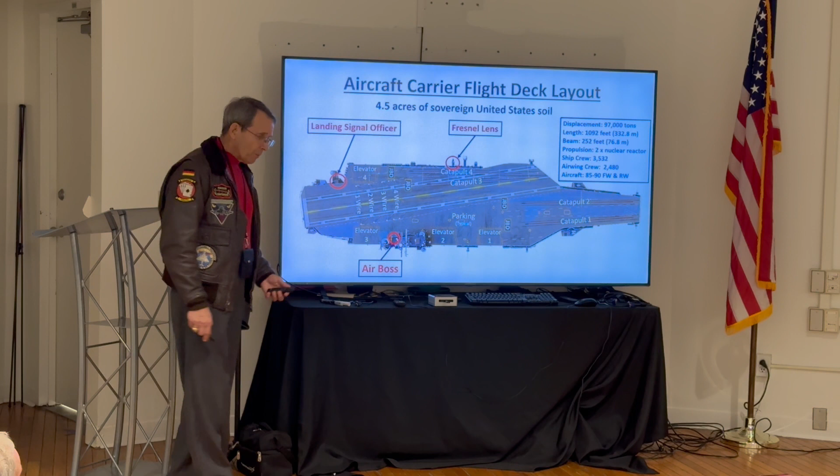In back of every one of these catapults there are jet blast deflectors. Those are a barricade or deflector of steel that's liquid cooled so it can stand the temperatures from an afterburner. They come up at about an 80-degree angle and are extremely effective at taking that jet exhaust and directing it up into the air.

You can bring a jet aircraft in right here in back of the jet blast deflector, while there's a guy in full afterburner here, and it's perfectly safe. It'll shake you around a little bit, but it's a perfectly safe operation. It keeps people from being blown off the deck.

Now, this is the landing zone right here. You can see the white on either side marking the limits, and down the center there's a white and yellow streak marking the center line. It's very hard to see here. There's also a red and white line around the deck, several of them.

Those are the foul lines. If anyone's over there, operation stops — you don't launch, you don't land. That's because it's too dangerous. When you're out there on the aircraft carrier, safety is the most important thing because everything out there is extremely dangerous.

Now, other important points here: the Fresnel lens. We're going to talk about this in detail later. The Fresnel lens tells the pilot very precisely where he is in relationship to the optimum glide slope that will put him down in the middle of the touchdown zone.

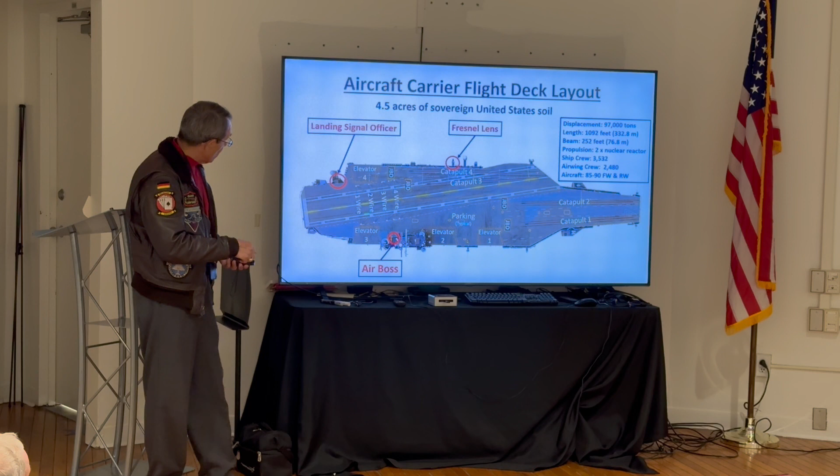That's where these wires are right here — 1, 2, 3, and 4 arresting wires across the touchdown zone. Each one of those is capable of bringing that aircraft, any aircraft, to a stop in about 400 feet.

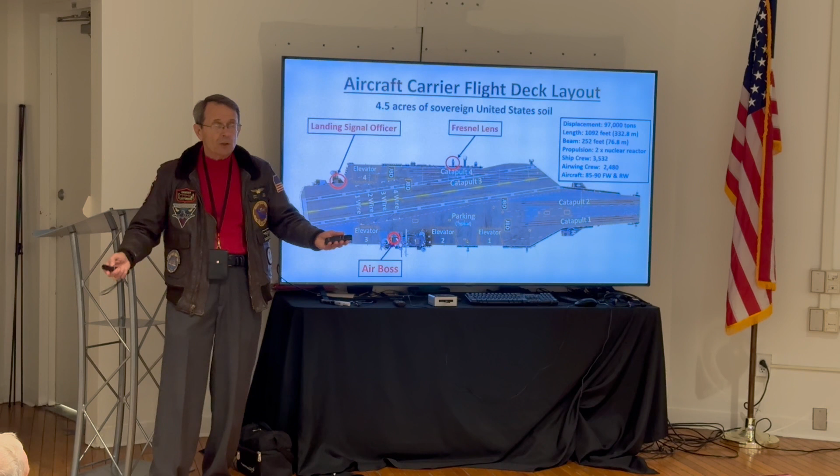If you fly the Fresnel lens correctly, you'll touch down between the 2 and the 3 wire. On the more modern aircraft carriers, starting with the Reagan, they only have 3 wires now, so they target the center wire because it's less people and a more reliable system. And aboard ship, they don't like it when you land in the first wire anyway.

So the other thing we have is that Fresnel lens. It's all the way down, and you can see it 2/3 to 3/4 of the way down the flight deck, which means the pilot can see that optical landing system all the way to touchdown. He should be watching it all the way to touchdown — not the deck, but that optical landing system.

Landing signal officer — yes, we still have that. Actually, it's a team of landing signal officers. They no longer wave flags. You saw them in World War II and Korean War movies waving flags, each one a different symbol to the pilot. We don't have that anymore.

Now he has a radio telephone. He's in back of a wind break, and there's actually a whole team of them out there that do the controlling of the aircraft. He's on a radio telephone and talks to the pilot — we'll go into that later. He doesn't wave a flag, but he talks to him and does other things out there. They're absolutely vital to landing aboard that aircraft carrier.

Then we have the air boss. He's back here on the rear of the island, and he's in charge of everything out here. Everything on the carrier deck he's in control of, and he controls the area around the aircraft carrier for 5 miles, up to 3,000 feet. Any questions about the aircraft carrier?

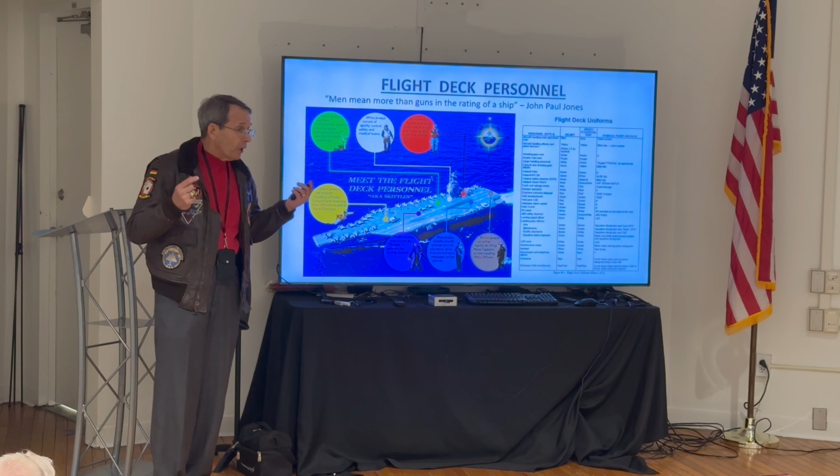Prime importance, yellow. These are the taxi directors. On an aircraft carrier, you do not taxi that airplane unless you're under the control of a yellow shirt. Yellow shirts give you hand signals like this. Everything is done with hand signals out there between the deck personnel and the pilots. If the pilot doesn't see a controller, or isn't sure which one is his, he'll stop the airplane. If an aircraft doesn't respond to the handler's signals, he'll give a signal like this. They love doing that to officers for some reason. But they move them around the deck because there are too many obstacles, too many aircraft, too much personnel out there.

Green jerseys, these are important guys. They do the catapults and the arresting gear. They hook the guy up, hook the airplane up, and retrieve the aircraft. It's a very dangerous job because they're out there when the airplane is actually being launched and when it's being recovered.

Purple guys give the fuel, they're the ones who fuel the aircraft. Blue shirts push and pull the airplanes, move them around the deck, and do that a lot of times in coordination with the yellow shirts. Maintenance guys wear brown, crash, fire, and rescue wear red, and other observers and medical come in white. That's basically the way it was all set up.

If you look at videos of the Chinese Navy, which has embryonic efforts at making a carrier Navy, they do the same thing. They have all these color-coded jerseys so you can see who's out there and if someone belongs there, okay?

Skunk Works tip. When I was aboard, one of the top engineers I worked with at Lockheed Martin Skunk Works told me one time he went out to an aircraft carrier. Lockheed gave him the opportunity to go. I said to Steve, one of the top engineers, when you got on that aircraft carrier, what impressed you most about it?

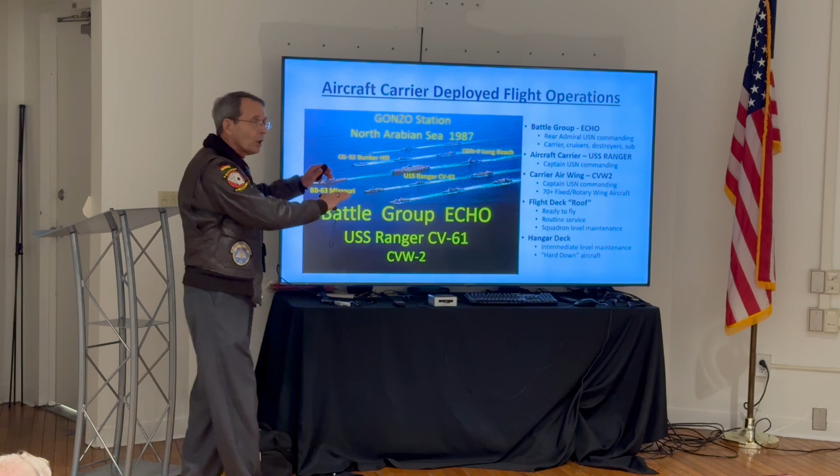Deployed flight operations. The aircraft carrier never goes alone. This is Gonzo Station here. This is what I did when I was on board the aircraft carrier in the North Arabian Sea in 1987, with my Battle Group, the USS Ranger and CVW-2, the carrier air wing. This is a long time ago, but take my word for it. We would go someplace, always as a battle group. The centerpiece is the Ranger, that's our striking power right there.

We have cruisers with guided missiles out there to give close-in guided missile defense. We can also augment that with destroyers that have anti-air capability and anti-submarine capability. Submarines—talk to a guy aboard an aircraft carrier, he's more scared of submarines than he is of airplanes coming in. We can handle airplanes. Submarines are the ultimate stealth weapon. They were when they were first invented, and they remain that way today.

Also, logistics ships, oilers, and fleet supplies. When we're underway, these are the guys that bring the food, and it's absolutely important. You run out of food, you run out of oil, you're out of capability.

A special note here, while we were over there on Gonzo Station, the USS Missouri, my home state, BB-63, that ship was giving gunfire support to my dad when he was a Marine on Okinawa back in 1945. And now she was recommissioned and she was out there working with us. She was a sight to behold. We don't have any battleships anymore, but it was really neat.

So essentially, with that surface action group, we had a battle force out there. That's the Missouri that was used for the treaty, for the Japanese to sign their unconditional surrender. If you ever go to Pearl Harbor, be sure to visit the USS Missouri. It's an incredibly rewarding experience to stand on the deck where the treaty was signed and to see the Arizona Monument, where the war started.

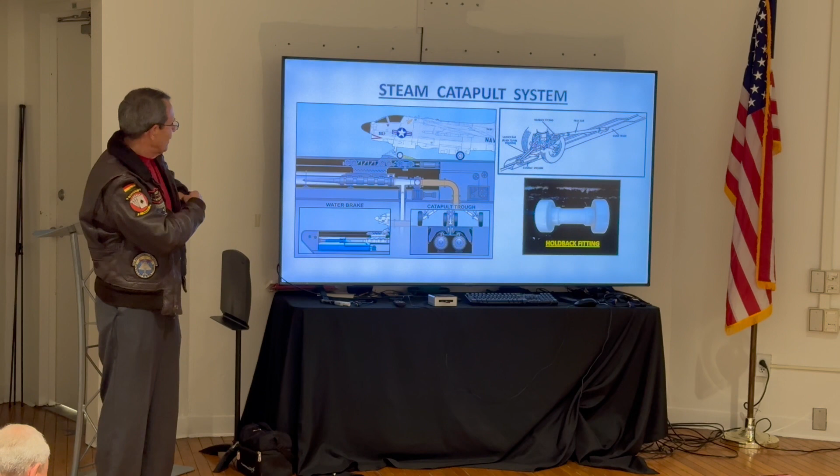Okay, steam comes up like this, goes through them, and there is the launch bar, which attaches to the nose strut.

Now, the aircraft needs to be restrained on the catapult. That's because when you open the valve to energize this and put the steam in, it doesn't build up enough power to launch the airplane instantaneously. It takes time to build up. If you didn't restrain the airplane, steam would go in, the airplane would be pulled down the deck and dribble off the deck and fall right into the ocean. So you have to restrain it.

And you cannot restrain it with just brakes, because an afterburning jet cannot be held just with the brakes. So what they do to restrain it is add this device right here, a holdback bar. One end is attached to the deck of the aircraft carrier, and the other end is attached to the back of the nose strut, just like you can see over there.

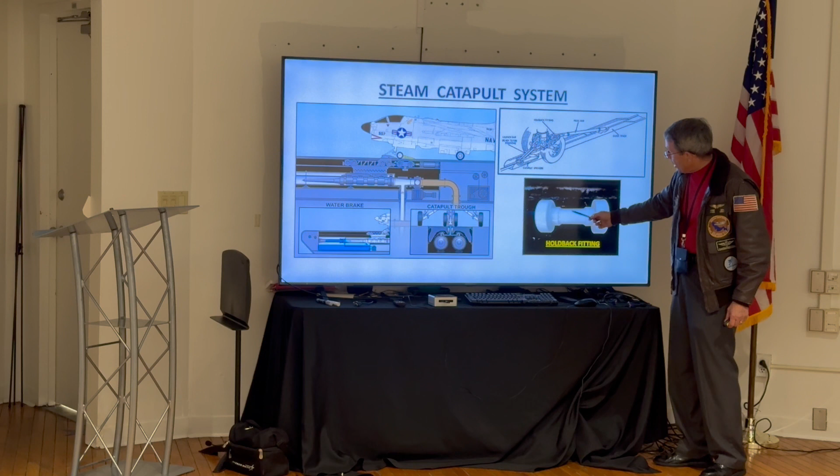Now, the link that makes that connection looks like this. It's called a holdback fitting. This little dumbbell-looking thing, or dog bone, is precisely made. This neck right here is machined down so it can hold that aircraft and restrain it at full military and full afterburning power. It is not strong enough to hold the aircraft when the catapult has full power.

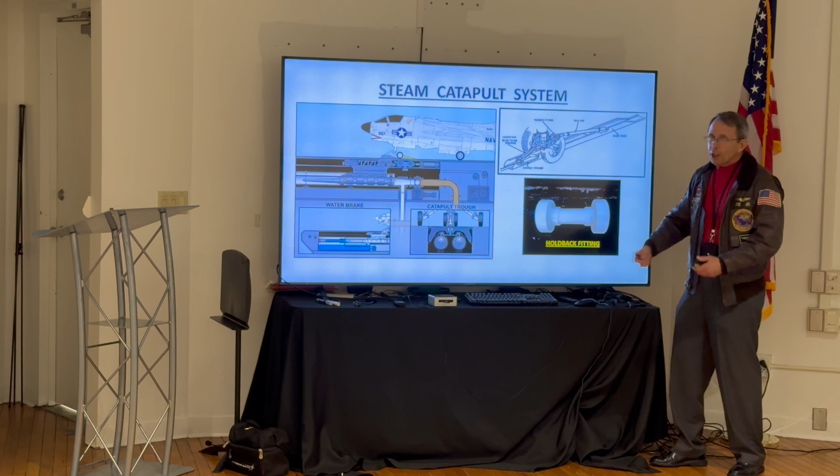And that's a safety device, because to ensure there's enough energy to launch the airplane, steam has to build up enough power to snap this in a pure tensile fracture. It'll snap, and that lets the airplane go. So they put steam in there, but it's not going anyplace until this thing breaks. They do have electronic versions of this now, but I'm from the old school, and this is the mechanical solution they have.

Is that clear? Does that explain everything? It's a very good, important device.

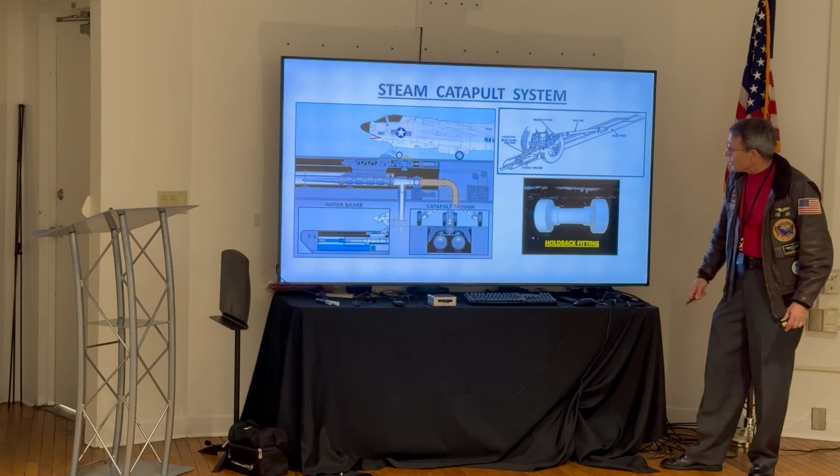Kind of looks like it's made of plastic. No, it's made out of steel, some kind of steel compound they have, and precise. It's not PVC, so no, it's not.

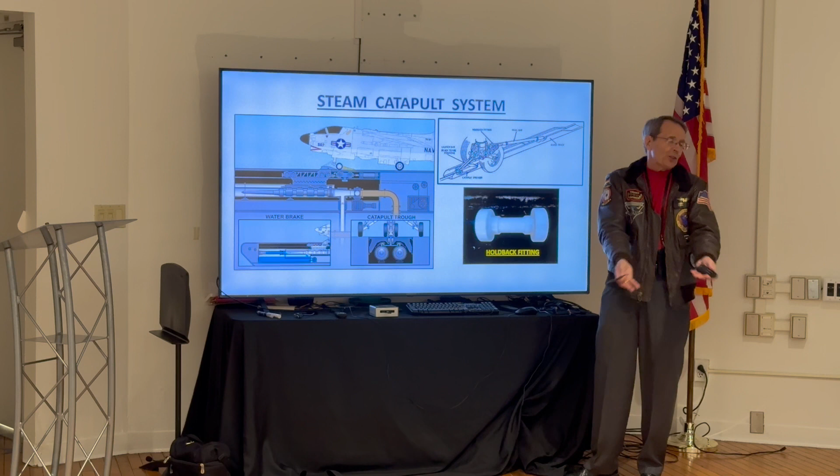I've got my first catapult shot, of course, to keep that, everyone does. So the sequence then is, the steam comes up through here.

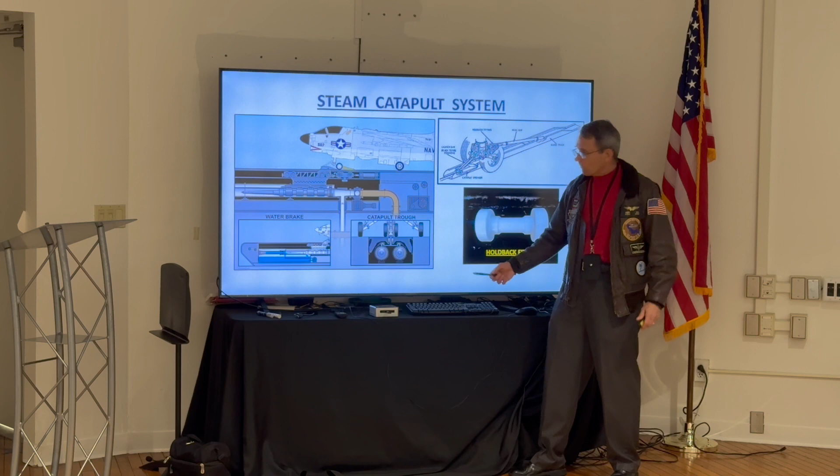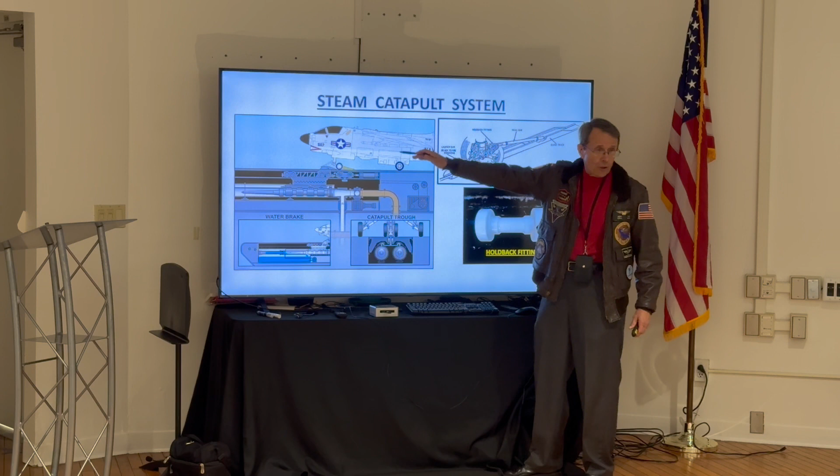Nuclear carriers' reactors, all they do is make steam, a lot of it. They fire that up, and when they're ready and hit the button, it lets the steam come in. It builds up power, snaps the holdback fitting. The aircraft goes rocketing forward and takes off, and you can take a 60,000-pound airplane from 0 to a safe flying speed of about 175 miles an hour in 2.5 seconds.

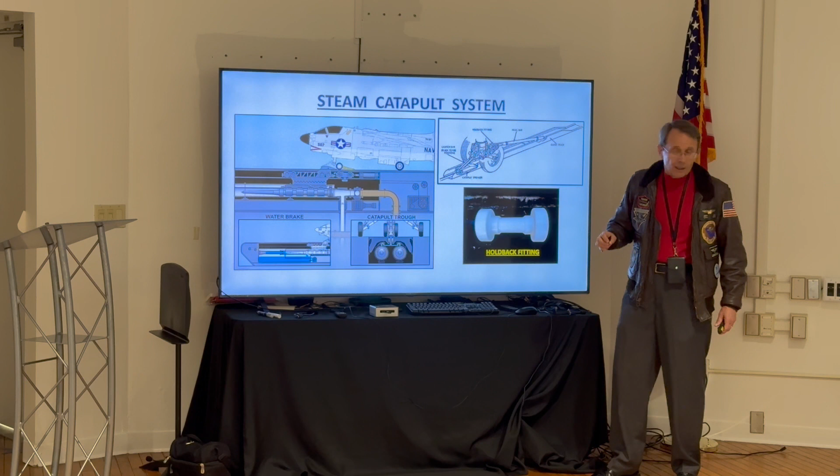Folks, it is like getting shot out of a gun. It's more fun than any other ride I've had at the amusement park. A little more intense at night, but it's really a fun ride.

Now, the last piece of this engineering miracle is the pistons here. The airplane flies away at 175 miles an hour, but those pistons are still traveling 175 miles an hour, so you have to be able to stop them. What they have is an ingenious device called a water brake. That's this right down here.

Now, the pointy, tapered ends of this thing go into the cylinders that are full of water. The water is incompressible, so they squish that water against the casing, and the energy is transferred from the pistons into the water brake. That energy, when absorbed, is a tremendous amount of energy.

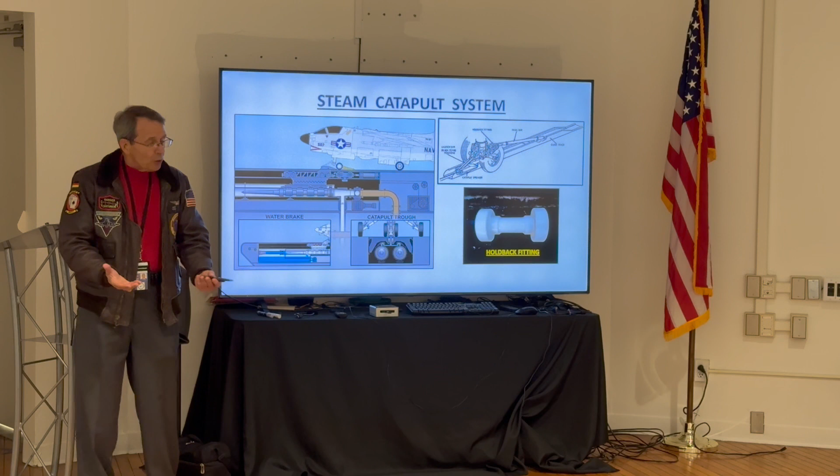So it will shake everything that's metal that's attached to it right there, and it transfers the energy to the hull of the ship. The deck plates are attached to the hull of the ship, so when that water brake hits, you can feel it wherever you are on the aircraft carrier.

The most remarkable thing, the first time I went to the ship, I felt this. I watched a guy launching on the deck, and there was a boom right at the end. I could feel it in my feet. You go aboard the ship, and that's how much kinetic force there is to catapult a 60,000-pound airplane.

So that's how we get on aircraft launch. Any questions?

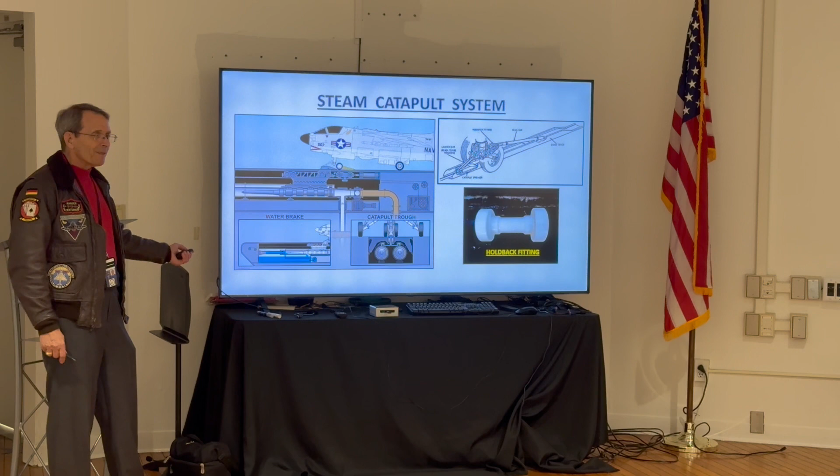There's a procedure to launching. Okay, let's go through it right here. Read through the actual steps right here while I go on.

First of all, the yellow shirt comes out when they're ready to go. They taxi you using hand signals. They will taxi you out and get you lined up on the catapult. Once they do, they'll drop the launch bar down.

The green shirt comes in and he hooks up the holdback fitting. He gets the launch bar hooked up. Now, once he gets everything hooked up and it's ready to go, he gives a thumbs up to the yellow shirt that's just gotten lined up. That yellow shirt will then give a signal to take tension.

You can see what he's doing, like a hand throwing motion - that means take tension. When they do that, they're putting steam into the catapult, because these fittings have to be all tensed up in order to carry the load. If it wasn't tensed up, you could snap everything apart with this tremendous amount of energy.

As soon as he does that, the pilot goes to military power. The green shirt runs out of there because he's standing in front of a cocked pistol with a finger on the trigger. He ain't gonna spend any more time there once that goes.

After that, the pilot's at military power, then he turns it over to the catapult officer. The catapult officer is the star of the show - no airplane flies unless he says it flies.

He'll come out there and give the same or similar signals. Two signals turn up like this means give me military power, make sure they're there. Then he gives the signal, if it's an afterburning airplane, for afterburner, like this. Now it's plugged into afterburner - things happen fast, he's burning a lot of gas.

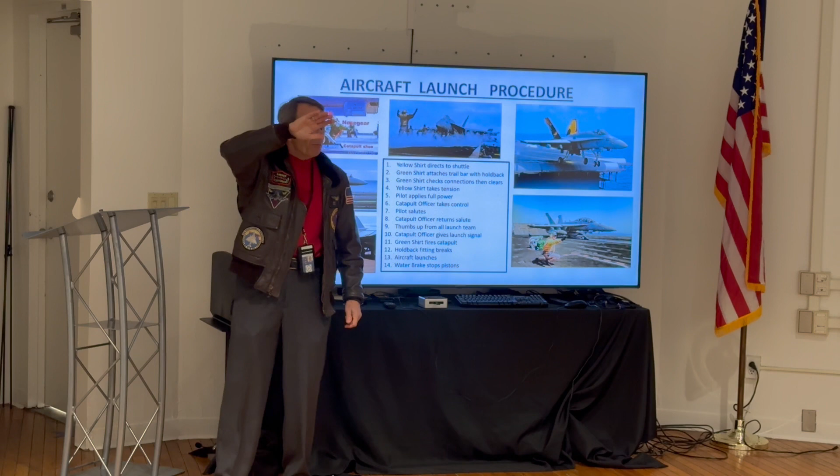He'll take one more look at the jets down here, make sure everyone's got green, and then he gives an unmistakable signal that tells everyone on that ship this catapult's gonna fire, stay clear. That signal is like this - he'll take his hand, bend down to his knees, and touch the deck.

Now this is a preparatory signal - everyone knows the catapult's gonna fire. The actual signal to fire the catapult is when he snaps his hand up like this.

And that's because ships don't sit still in the water, they pitch a lot. He wants to time the launch, the buildup of energy, and the snap of the holdback fitting to match the pitch of the ship, because he wants that thing to fire when the ship is pitching up, not down. We want to launch airplanes, not submarines, right?

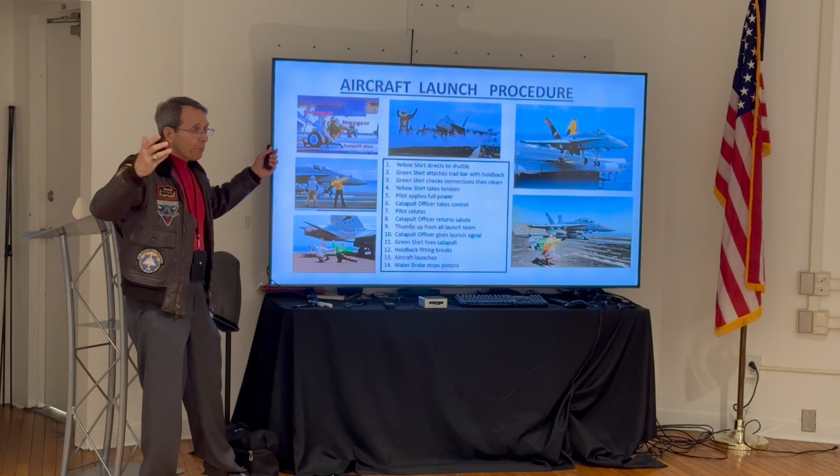So that makes sense? We'll take a look at that later on. He gives a signal, presses the button, steam fills up, the holdback breaks, the airplane goes rocketing down the deck, just like you see there. He flies away and the water brake hits. What could be simpler, right? That's how we launch an airplane from the aircraft carrier.

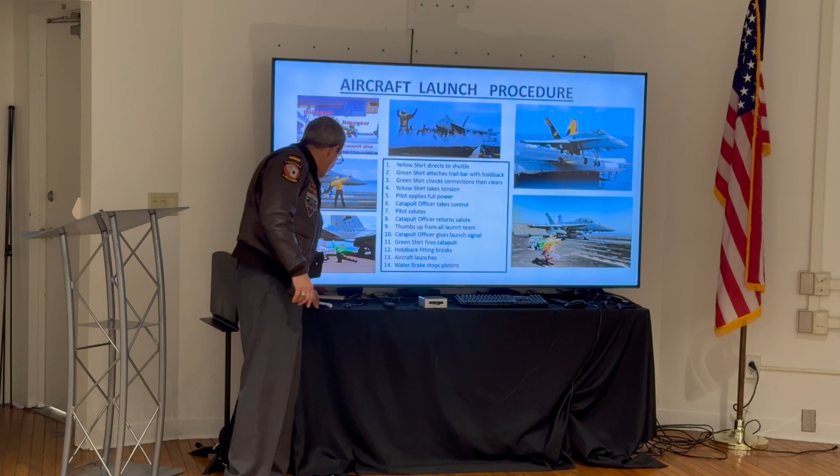Any questions? Who's controlling the catapult and everything? Okay, you've called my hand. This is the way we used to do things - there'd be a green shirt on the side of the deck right there. When I went in, the older ones, he had his hands up like this.

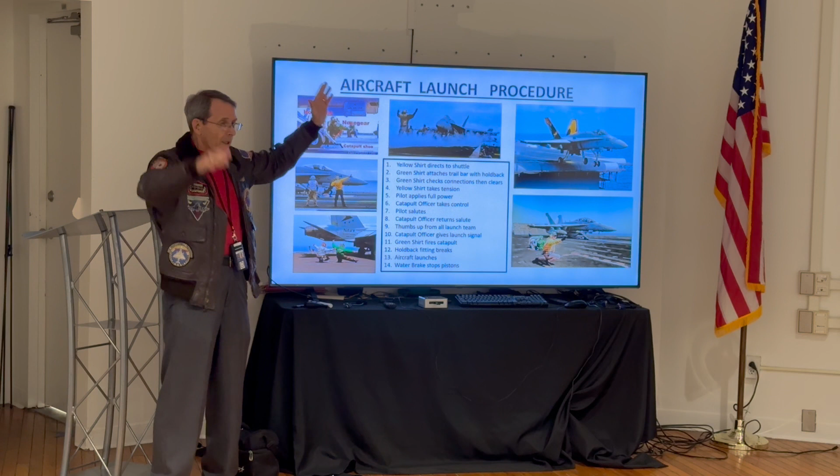Now there's a button, he reaches down. He's got his hands up like this because if people are on that catapult, they wanna make sure he ain't got his hand anywhere near that launch button. He's the guy that does it.

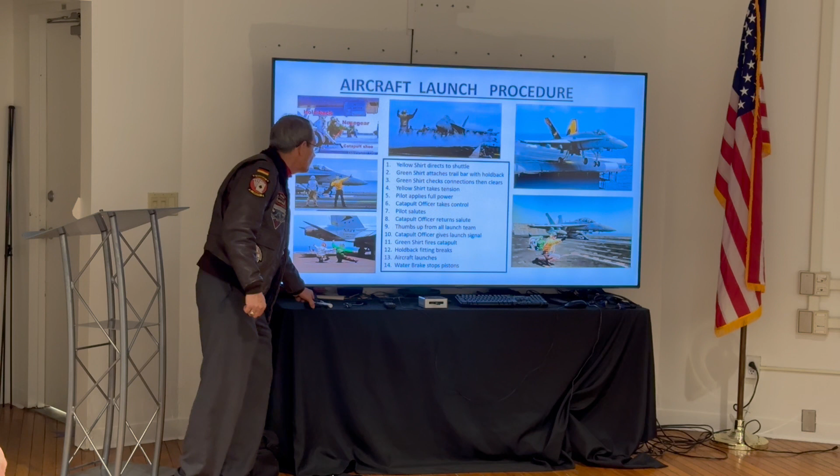Now there is sort of a cupola, and the catapult officers stay inside there and actually control it themselves electronically. The way they do things now is more modern, more safe - it's just not quite as colorful, but that's the way we used to do things, and that's where I agree. Now the catapult officer actually can hit the button. I guess I'm an anachronism, so.

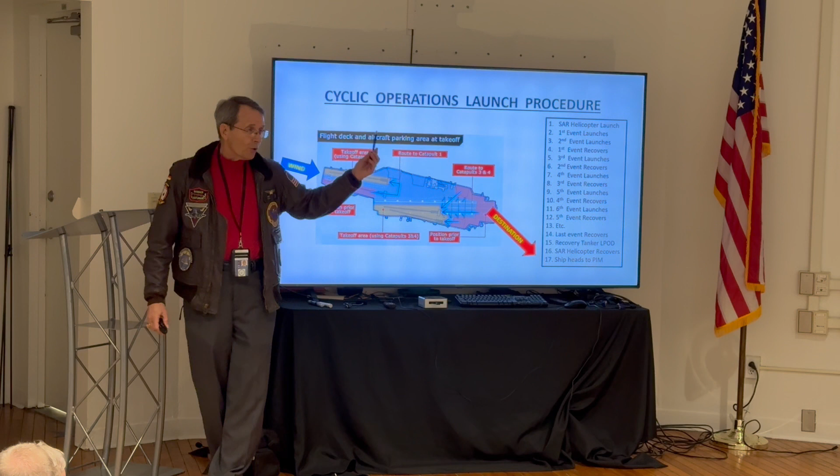Right here, already in position, are the helicopters, because they're the safety factor - they launch those first. The next airplane to go airborne is the E-2, because that's the eyes of the fleet. In my mind, it's the most important airplane the aircraft carrier has.

Everyone else is going to be launched on what they call an event. It's parked like this, for the first and second event, so they can quickly get up here, cross over the jet blast deflector, and get hooked up to the catapult. It's important that they're positioned like that so they can quickly move the airplane from its park position to the launch position, to the catapult they want to fire it off. So this is basically the way we do that, and how it's controlled.

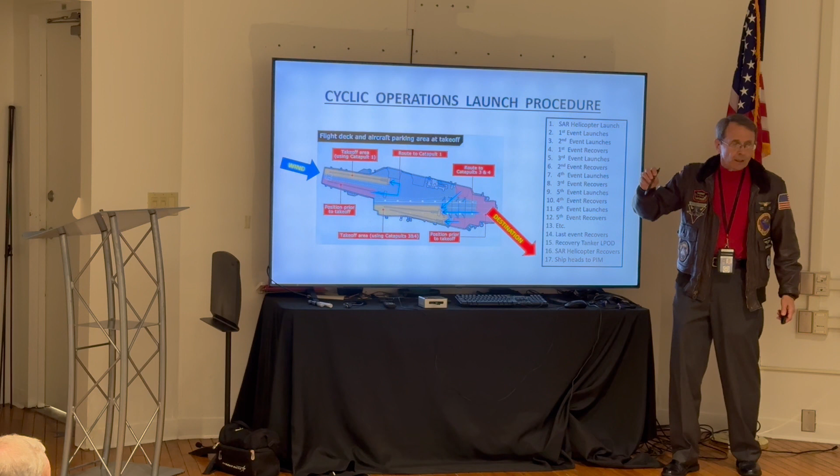Helicopter launch, and then the first event launch. In an event, generally speaking, every squadron on a ship gets to fly an airplane, or maybe 2 airplanes on an event. So if you have 10 squadrons, say realistically 7 squadrons aboard, that means 14 airplanes are going to launch off an event. That's basically how it would be done. So the first event, they move them quickly into position, they're already on the catapults, they start launching, and then the other ones in the event start moving up there to get their position.

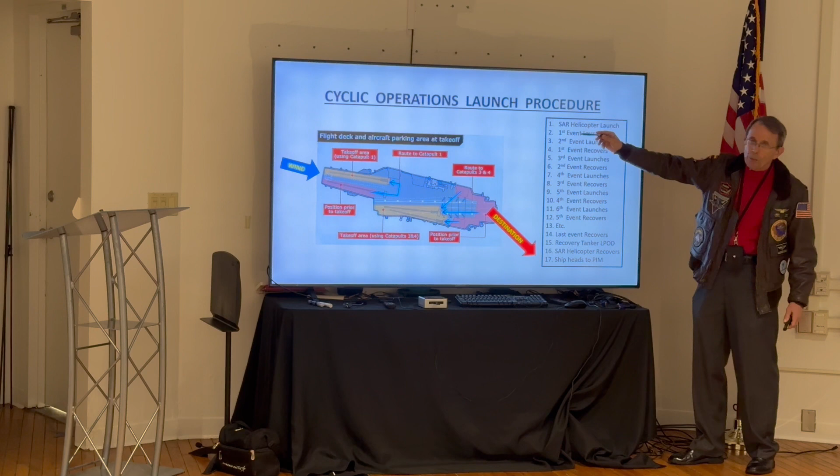The first event launches, everyone's airborne, and they're on a cycle. Probably now I think they're on a two-hour cycle, hour and a half or 2 hours, meaning that after you launch, about an hour and a half or 2 hours later, they're going to bring you down to land. Now while they're up there doing that, the second event gets ready to launch and gets positioned. What they do is they will launch the second event before they recover the first event. Because if they do that, there's a lot more clear space on the deck for landing airplanes and getting them over the foul line so they can continue to land.

Now that type of sequence continues all the way throughout the day. First event recovers, third event launches, second event recovers, fourth event launches. And that's repeated all the way down till the end of the day, the last event of the day. And the last airplane to land will be the recovery tanker.

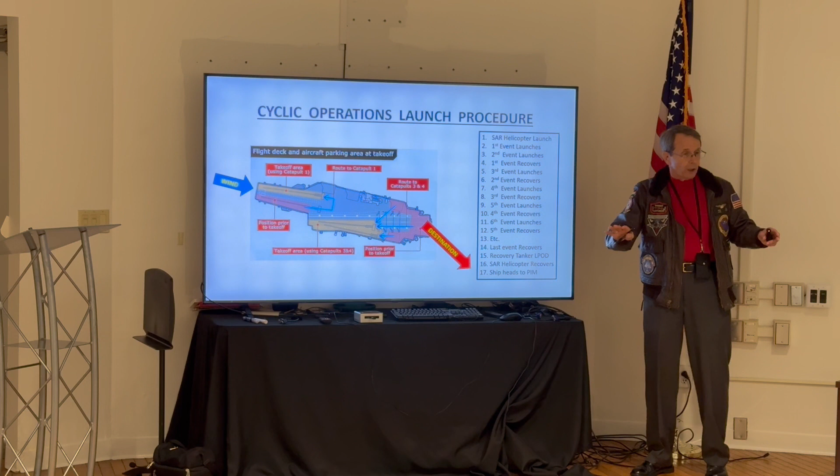In every event, there will be a tanker aircraft that takes off. Because anything can go wrong at sea, and if there's any delay, you want to be able to give a guy extra fuel. So that's what they do, and they check the tankers to make sure they are what they call sweet, meaning the tanker actually works. I've been the last tanker more often than I really wanted to be, but you're the last guy up there, the last fixed wing flying. You land, the helicopter lands, and then the ship goes on its merry way.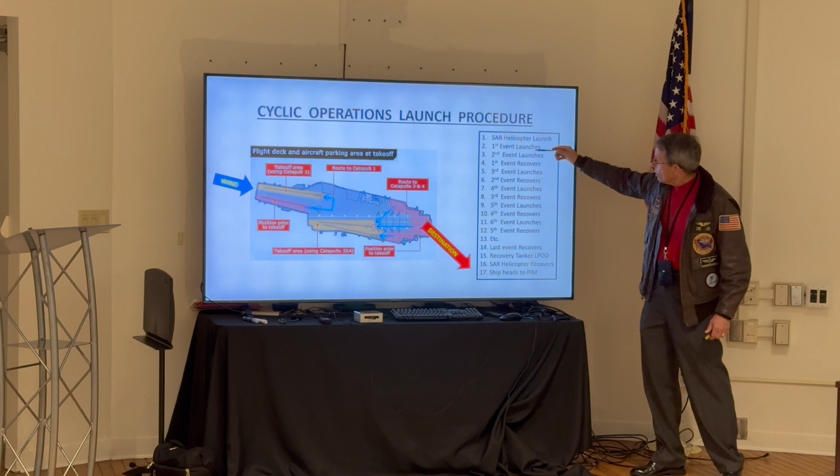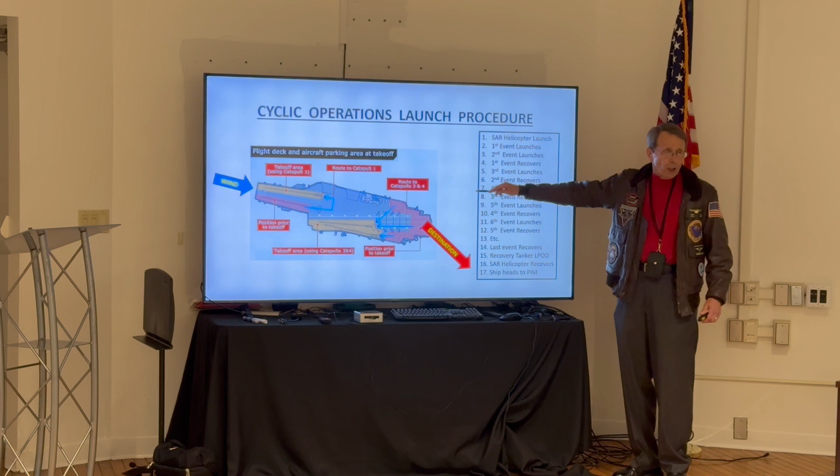Now all of this, launching and landing, is done at one time, and they do it as quickly and expeditiously as possible. Daytime, they're looking at 30 seconds between aircraft, and at night, 40 seconds. Why is that? Well, it's because this airfield, like any airfield on land, airplanes have to take off and land into the wind. However, this airfield also has to go someplace.

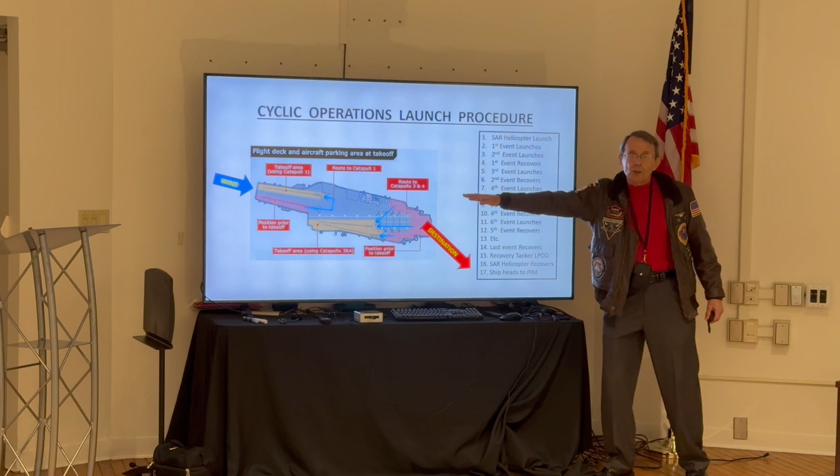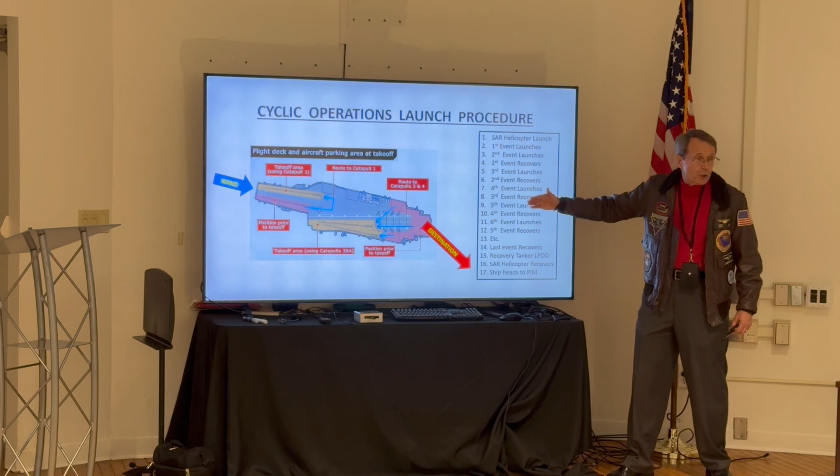And Mother Nature never cooperates. It seems like every time we're out there, we've got to go someplace, Mother Nature makes the wind blow from the opposite direction of where we have to go. So the ship may be going 20 knots in the wrong direction and has to make that up. It'll have to make sure it goes to the spot where the guys that just launched are going to look for their recovery time. So that's why they do everything as expeditiously as possible with the ship.

So this is the cyclic operation, the launch and landing procedure. Any questions? Good. Okay, recovery. This is the most important part of it and the hardest thing to do.

He'll give them advisory comments like don't go high. He'll give them mandatory comments like power. He controls them all the way down verbally.

Every time an LSO, there's one controlling LSO there. Every time the controlling LSO controls a group, he goes down to the ready room and talks to that pilot immediately after the landing, because they debrief him on what he did, what his grade was. Every landing is graded, and he tells them what your grade was for that landing, and he looks for any sort of trends out there. Says you could have done this better than that, and that's important.

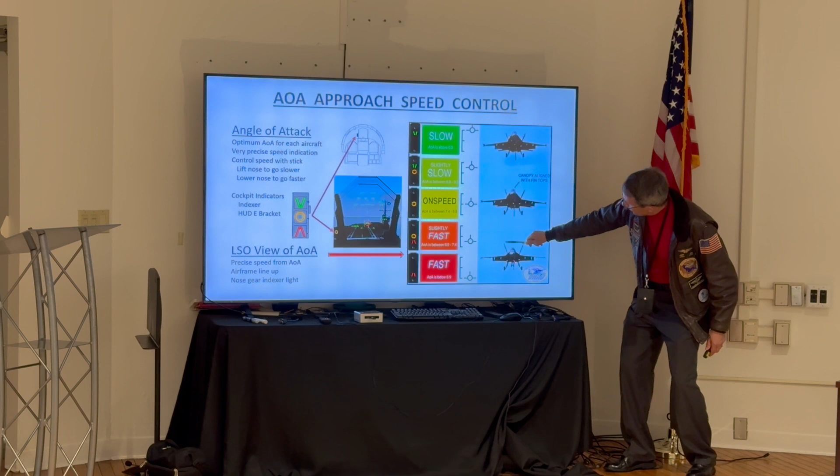Can you see here how the canopy bow is above the fins? That means the nose is up, it means he's getting slow, right? And if he's down here, look at the difference there. Now he can see that he's fast here. So you can see the airplane coming in, and that's what the landing signal officer will look at. He won't rely on just the lights.

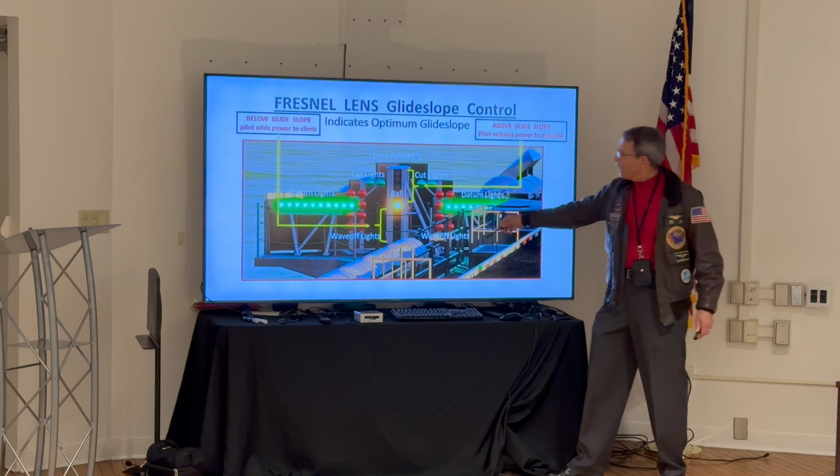The other device we have for landing aboard the aircraft carrier that helps the pilot immeasurably is the Fresnel lens. This optical landing system was invented first as a mirror used by the British. We copied that and made it better, because now it's a series of Fresnel lenses. Fresnel was a French physicist who made what's called the Fresnel lens, that's what makes a lighthouse a lighthouse. It can take the light and spread it and concentrate it into a beam. These are overlapping Fresnel lenses here, and they result in a yellow ball right there.

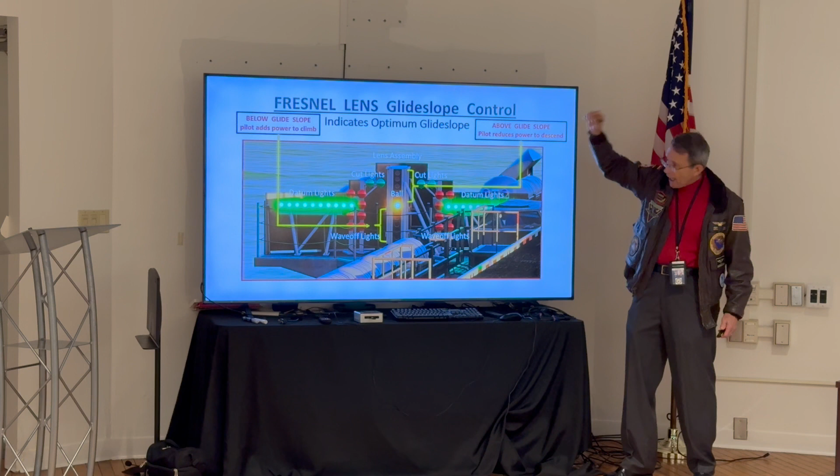Now the pilot wants, and the other lights on there are datum lights, a line of lights right here in green, so they're unmistakable. They represent the optimum glide slope coming into touchdown. Red lights are for wave off. If there's a dangerous situation and the airplane cannot land, the landing signal officer will hold those up like that, flash the red lights, and he'll talk verbally, wave off, mandatory call.

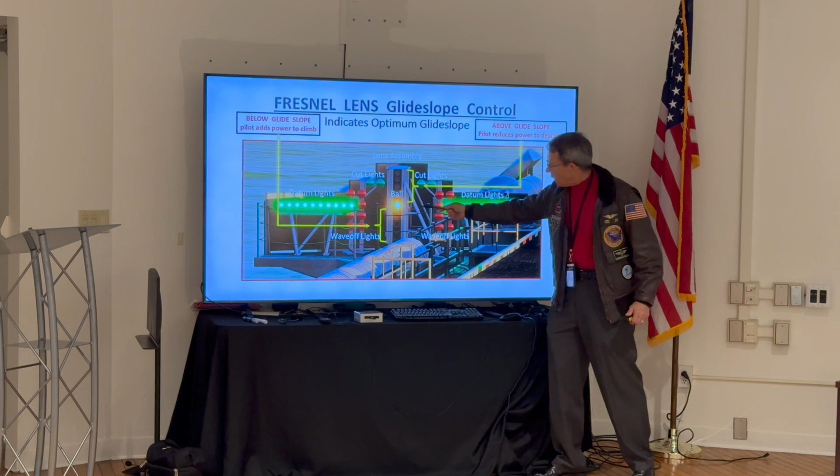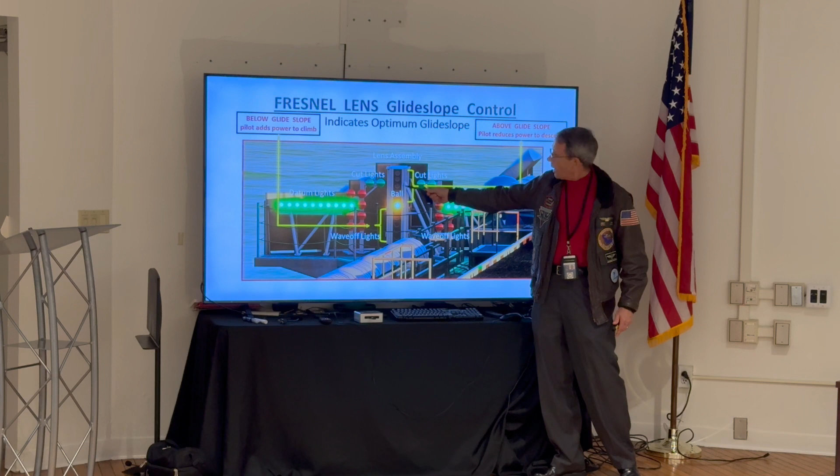So this is how it works, what the pilot does as far as controlling his height. He controls height with throttle. Gets the airplane trimmed up, and if the ball is right here, even with the datum lights, he's on that precise glide slope, right around 3.5 degrees. If he sees the ball up here, he knows he's above that glide slope. He reduces power, the airplane settles till it comes down, he tries to catch it and adjust his power. If it's low, just the opposite, now he adds power, the airplane climbs, the ball goes up. So that's what he looks at.

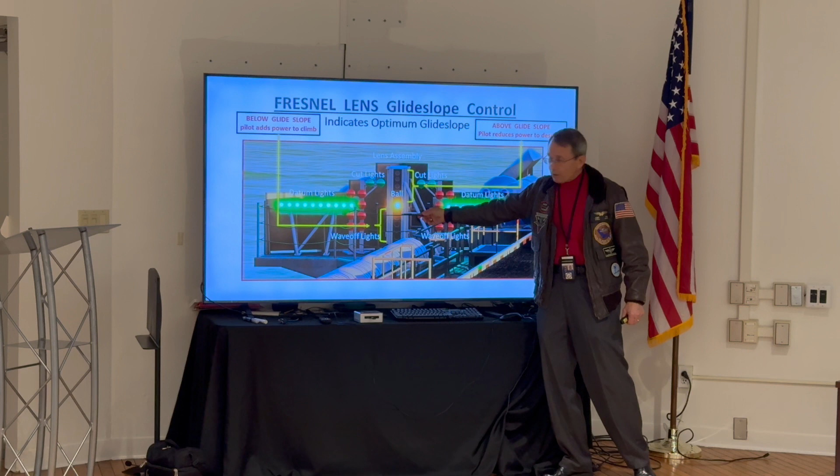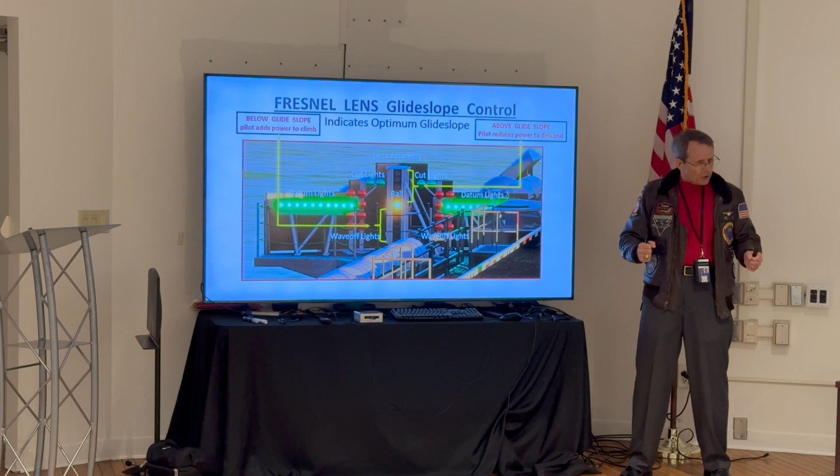This display is good for at least 3/4 of a mile in back of the ship, and it's very precise. So it's funny, he's controlling his speed with the nose and height with the throttle, which is kind of backwards to the way most people would fly an airplane, right? But that's what they do to give you a precise landing capability. This all make sense now? Good to go on?

What does this look like when you put it all together? Well, this is what it's going to look like. This is inside the cockpit. Now remember, altitude, throttle. Airspeed, stick. And of course you're going to be doing line up like this. So it makes kind of a busy cockpit here.

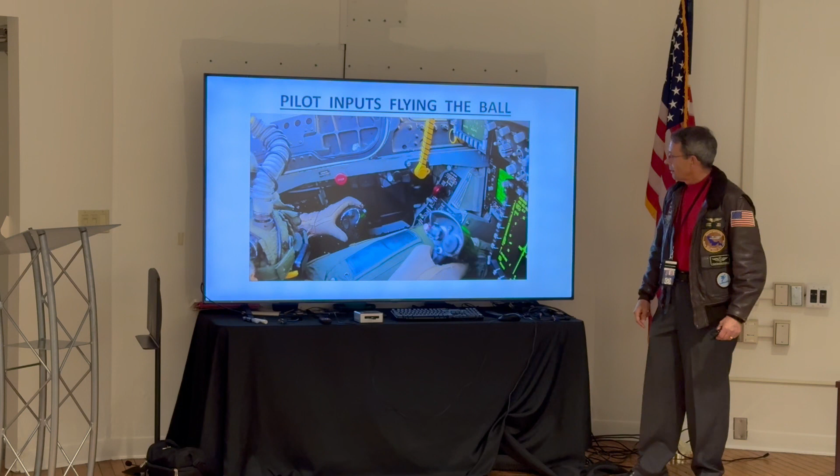Notice the throttle goes to full military. What could be easier, right? It's pretty busy back there, in 3 seconds when you're back at 3/4 mile in back of the ship. That's what it looks like.

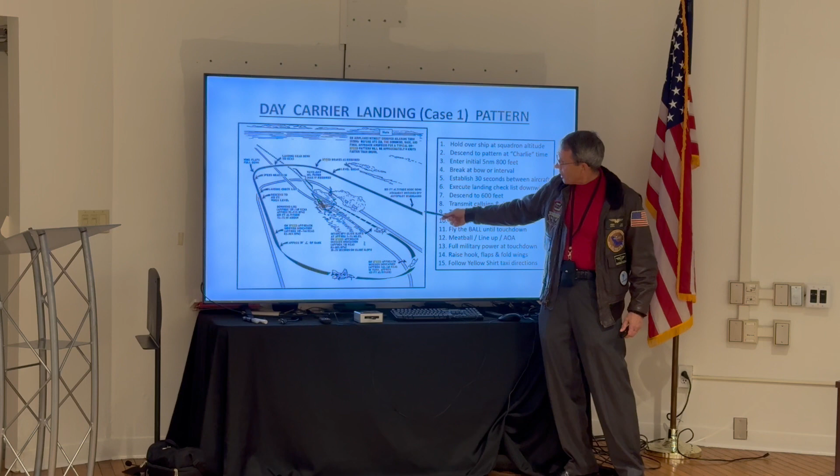How does he get there? During the daytime, the airplanes are ready for their recovery. Remember, everyone recovers at the same time, like we mentioned earlier. The airplanes are called down at what they call a Charlie time, signal Charlie, come up here and start coming down. 5 miles in back of the ship, they get up to 800 feet, a flight will come in, usually at least 2 airplanes together. They come up to the bow of the ship, doing 250 knots, maybe a little more.

They'll do a break over here, descend to 600 feet, and trim the airplane up to land. They make a call to beam, who the pilot is and what type of airplane it is. Now he's down to 600 feet. When he's abeam the stern of the ship, he starts his turn in, and he'll roll out about 1 mile in back of the ship.

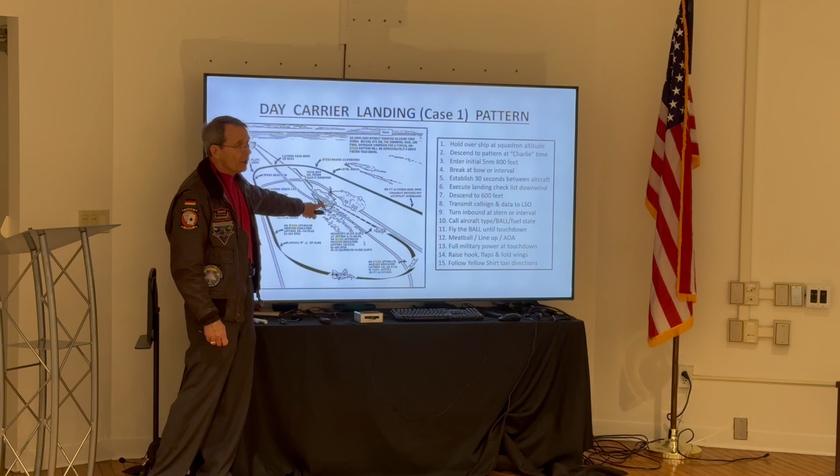That's where, as you just saw, he starts operating the throttle and stick together and flying the ball. He'll come down and make an arrested landing. If he doesn't make an arrested landing for any reason, they call that a bolter, if the hook doesn't engage. He'll take off, get up, come back down, and rejoin the pattern, picking up the interval of the airplane.

This is what he did. Those are the steps over here. And you can see.

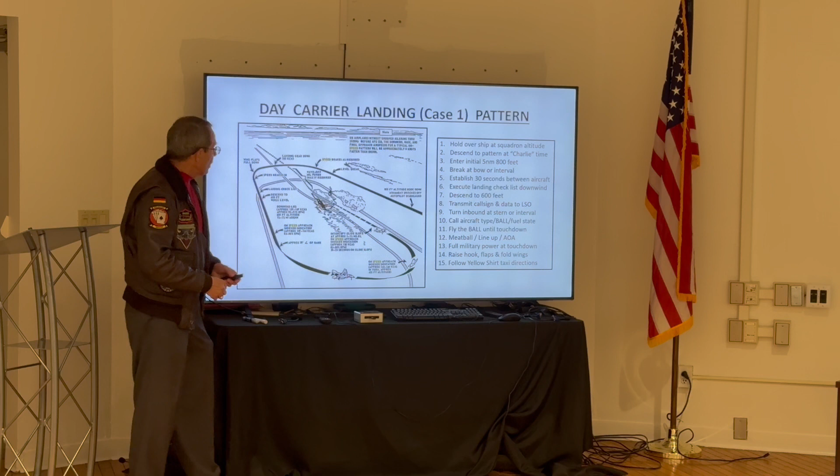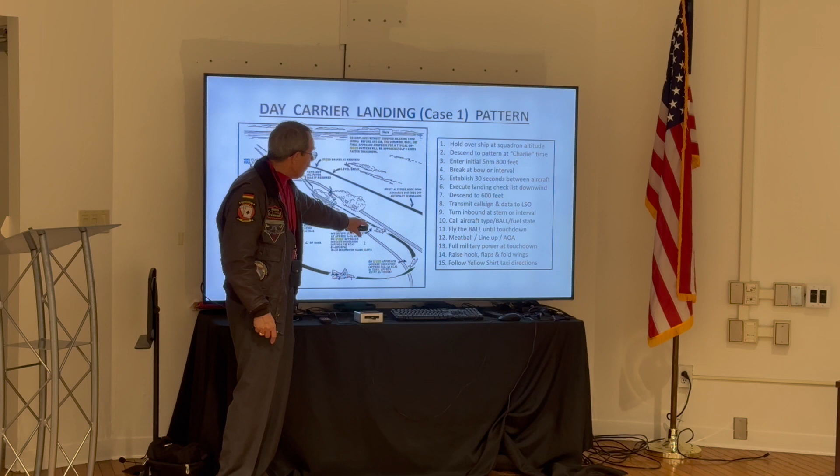When he gets to this point, I probably should have mentioned, he calls the aircraft: Intruder ball, and the amount of fuel he has. Intruder ball, 5.0. The LSO responds, Roger ball, Intruder, looking good. Then he flies the ball into touchdown just like you saw, meatball, lineup, angle of attack, all the way down to touchdown.

When he gets there, this is what it looks like in the daytime. You can see the touchdown zone there where the arresting gear cables are, and you can see the meatball right there. You watch that all together, and you can see right there, he's got optimum altitude, right on the glide slope.

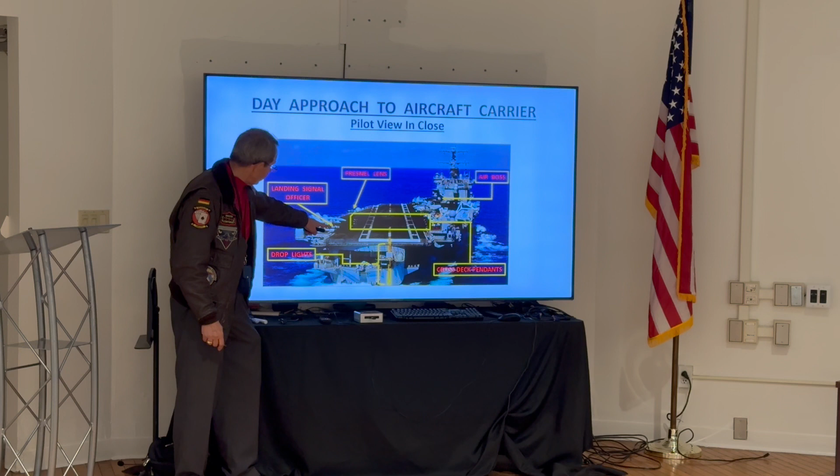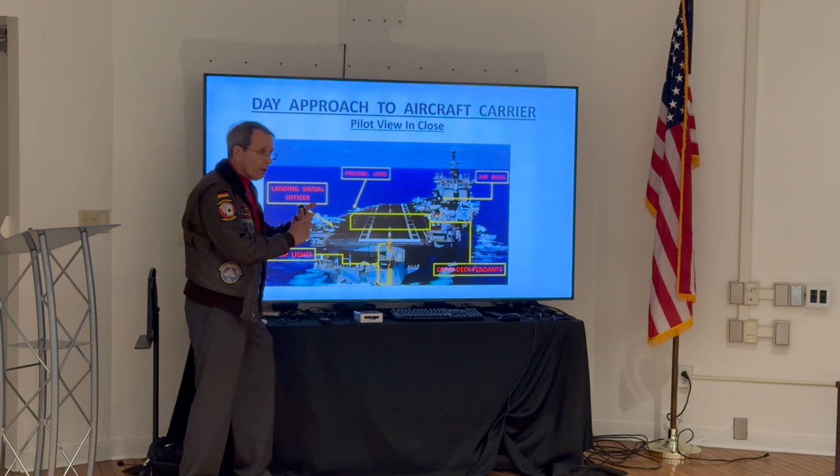The LSO is over here, cross-checking the pendants here. The air boss is up here, watching everything that's going on. These are drop lights, used mostly at night to give you an idea of your lineup, so they're not really used much during the day - you'll see how they're used at night. That's what he sees when he comes down after he gets off the ball and starts flying like he just saw.

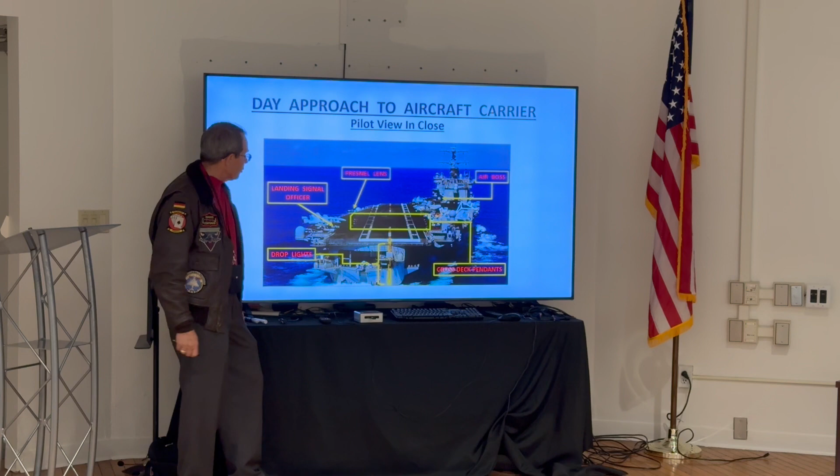What about night? Night or bad weather, it's always what they call Case 3. Now here you'll see familiar flying. This is an approach plate, just like you have an approach plate for coming in and doing an approach at any field.

You'll see it outlines all the details of that flight, and you'll see the airplane comes down on the approach, and its relationship to the final bearing - that's where the lineup of the angle deck is. So they do everything with respect to the angle, to the final bearing. They do a descent, come down to get to 10 miles at 1200 feet, get into 3 miles, begin their final descent, and at 3/4 of a mile they get the GCA-type of approach. It's called the CCA, carrier controlled approach.

They give them advisories all the way down to where it comes in close. Then at 3/4 of a mile, they call the ball, and then it's visual from that point on.

This is how they set up for it, to do a night recovery. When they do night recoveries, this separates the men from the boys. Everyone is lined up here on the final bearing, and they put one nautical - each of the aircraft is holding individually. There's 1 nautical mile and 1,000 feet between each aircraft in the stack.

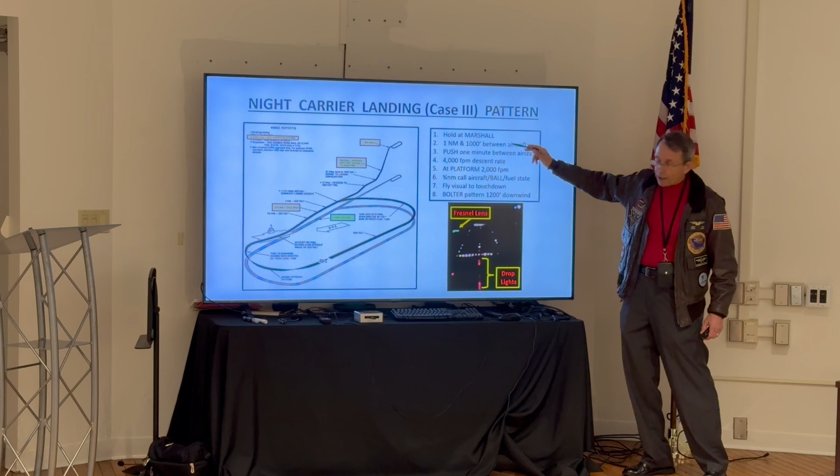All of that, in the event, is in the stack. They push 1 minute apart and descend at 4,000 feet per minute. See, that's this line right here. When they get down to platform at 5,000 feet...

When they hit platform at 5,000 feet, that's a wake-up call. They call platform, and then they decrease their descent to 2,000 feet per minute. Then they fly that approach in until they get to that spot at 3/4 of a mile, and call the ball. Then they fly visually onto touchdown.

If they get a bolter, the airplane gets back in the air again. If they don't get a direction for some reason, they climb straight ahead to 1,200 feet, and then circle back around like this. The aircraft carrier control center will work them back into the pattern when they have the capability to space it. And that's what it looks like at night.

Don't have a very clear picture of this - I don't know if we snapped that picture at night, but that's the best I could do. These are those drop lights. You can see there's a little bit of an angle between there; it should be a straight line here.

The Fresnel lens is over here. But the important thing, the big difference is, he's flying good solid instruments all the way down to that 3/4 mile point, and then he's visual.

He's got to fly a visual approach, and his only attitude reference at night is that triangle, that rectangle, that trapezoid. That makes it extremely hard for anybody, but that's what you have to do.

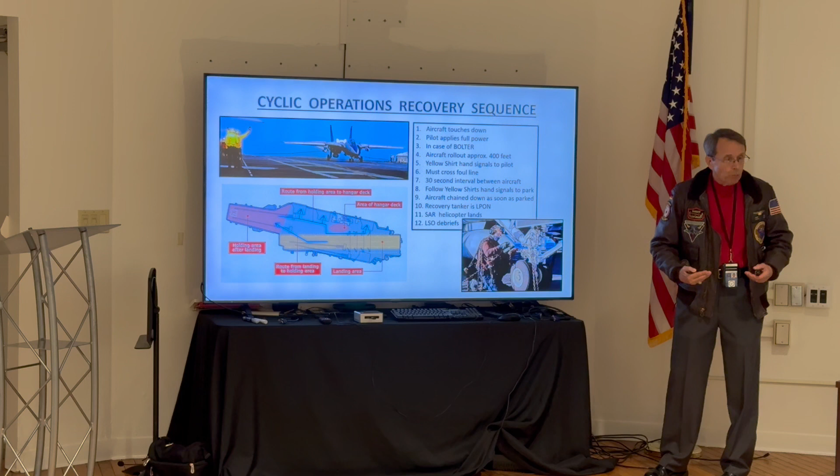Okay, the recovery sequence now. We looked at the takeoff sequence, now the recovery sequence in cyclic operation. The aircraft touches down. The pilot applies full power, because if the airplane bolters, if he doesn't get an engagement for any reason, he wants to make sure the airplane's already accelerating so he can go down the deck and airborne again, come back around and try it again. You might have a bolter in every second—I don't think you have that many bolters anymore, but things can happen. Once he lands, it's very important, like I said, he's got 30 seconds between aircraft.

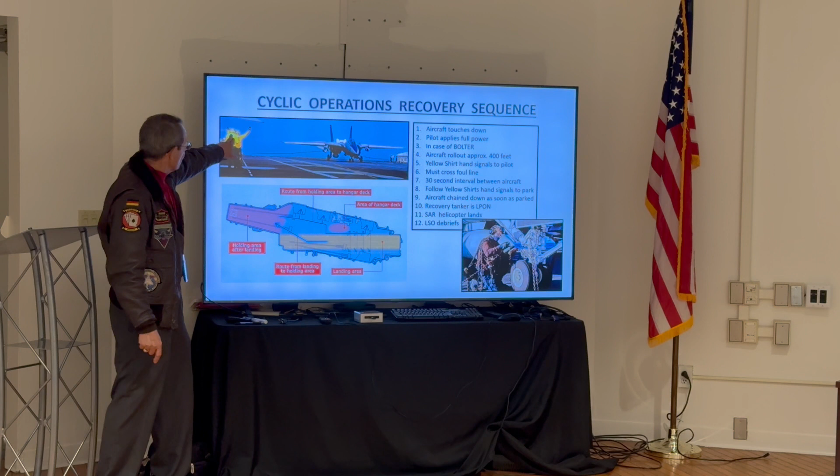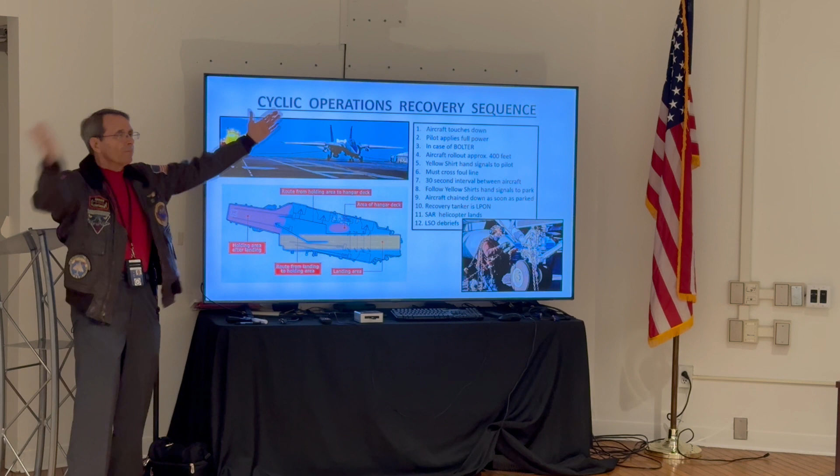Even in daytime operations, you have a yellow shirt who gets him over the line, over those foul lines. Remember, he's gotta be taxied. Here's the yellow shirt right there, standing on the other side of the foul line. That airplane lands, that's the first thing he sees. He kind of motivates the guy there, gives him that signal: off the brakes, make sure you're off the brakes. When the hook runner gets a hook free, hook up. Taxi forward. Taxi left. Taxi right. Taxi forward. Fold your wings. Taxi toward me, go to the next controller. He's helping motivate him, remind him of things he's gotta do.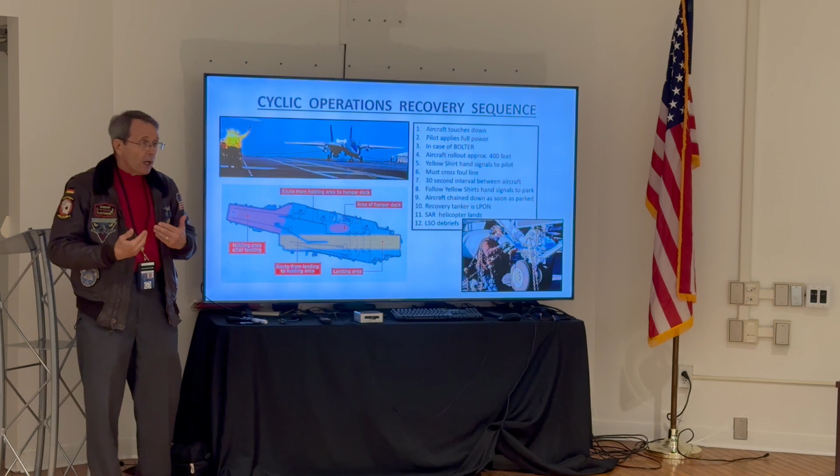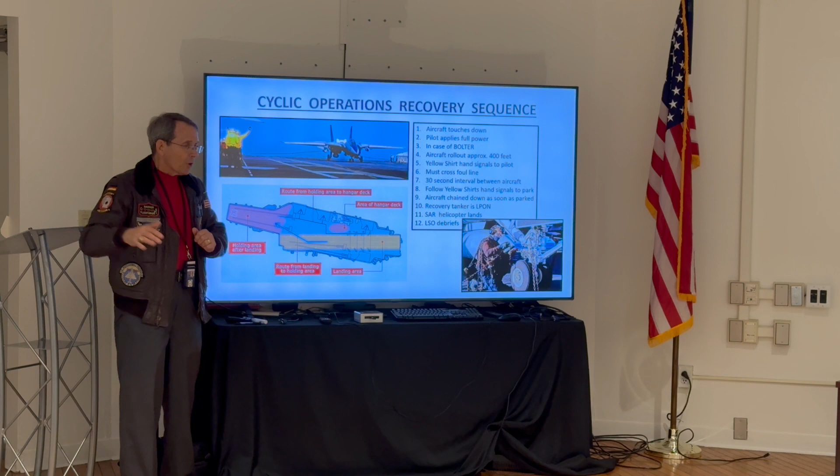Because of that sequence, you have to get him landed real quick, because the ship's got someplace to go, and the wind's probably not cooperating. So that's what happened to me. As soon as they can get that guy down and to the place where they're gonna park him, the chain gang comes out there and chains him to the deck, because when that deck starts moving, you could have an airplane slide across it. We've had that happen once in real high seas up in the Pacific.

And so that's how the recovery, the sequence of the recovery, works for everyone. Any questions?

Okay, this is a video that I put together—I found this on the internet and edited it a little bit. You should be able to see everything that we just talked about, and it should make a lot more sense to you now than if you just looked at it. So this is gonna show launch and recovery.

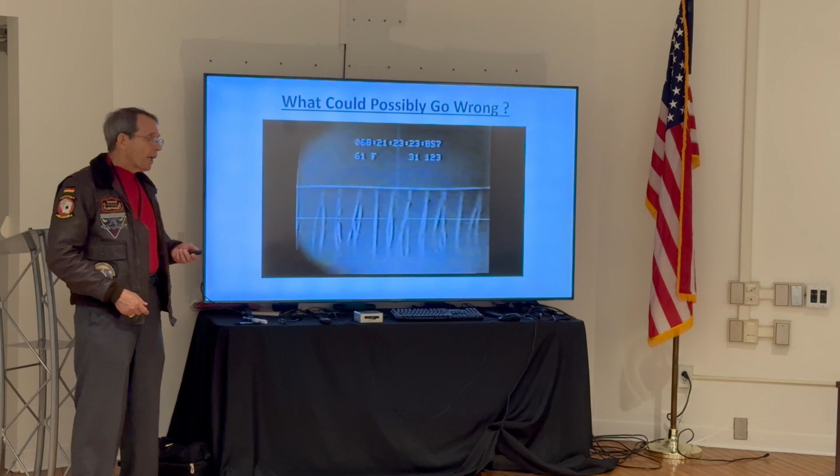Well, the thing we did is we had the best LSO in the Navy on the platform that night, and he brought one airplane down after another. One of the airplanes coming down, the deck was a little bit off. He was coming down and the deck came up a little faster, and it snapped his right main axle.

So he's got one stub axle out there. We diverted a lot of aircraft to Midway Island, but he can't go there, he can't make Midway in that dirty configuration. So he's in for a night barricade with the deck pitching plus or minus 30 feet.

So, like I said, Bug Roach is in control of this. That's the Plane Guard destroyer right there. Look how much the deck is pitching. He should be in the crosshairs here. That's the A6 coming up.